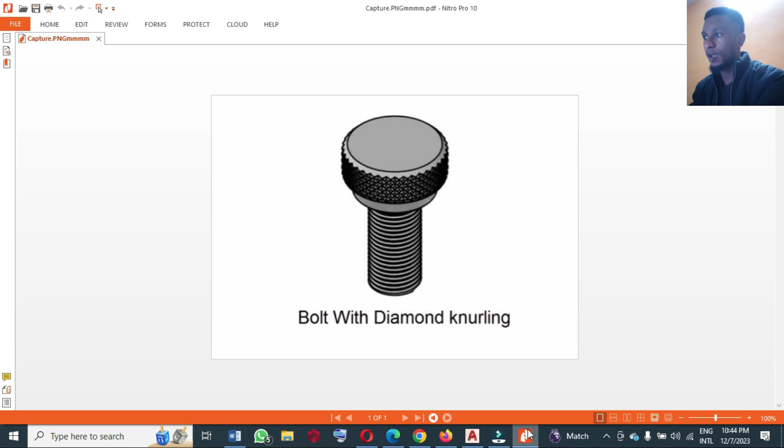This is going to be the second advanced practice drawing we are going to make. Today, we are making bolts with diamond knurling. It's going to be a little challenging, but with the previous knowledge we have got, we'll be able to make this happen. So, without wasting time, let's go to the AutoCAD environment.

So before I start, I'm going to turn off my grid to make this environment neat. I will start with the circle tool, and make a circle of radius 5 units.

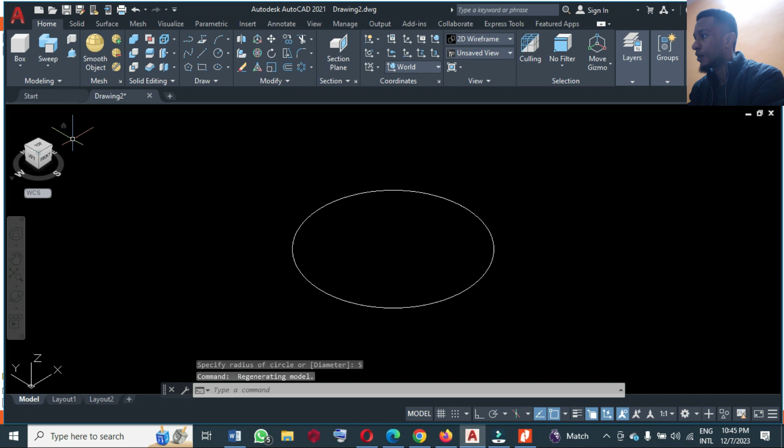And I will convert this circle to 3D. For me to do that, I would click on this home icon, then click on Press Pull. I will click on the circle and make it a unit of 20, then I will have this.

Okay, so I'm going to change the view to shaded so that I will see what I'm doing. Alright, I can now delete the 2D circle object that is here because it's not required again. I've deleted that circle now.

Next thing I'm going to do is make a helix. Let's see, so I'm going to pick this helix. I'm going to locate the center here at the bottom and make a radius of 5, just type 5 at the bottom.

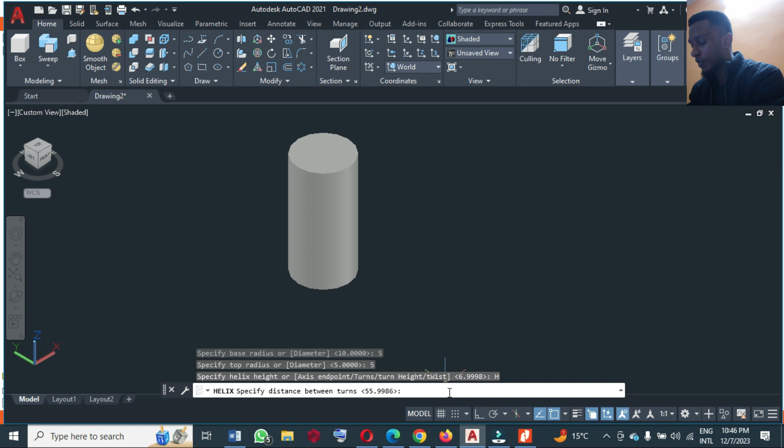That is the base radius 5, and the top radius also 5. At this point, I'm going to select heights here and then type a height of say 1 unit, I'll have this. So I'm going to locate the top center of this drawing and click, then I have this.

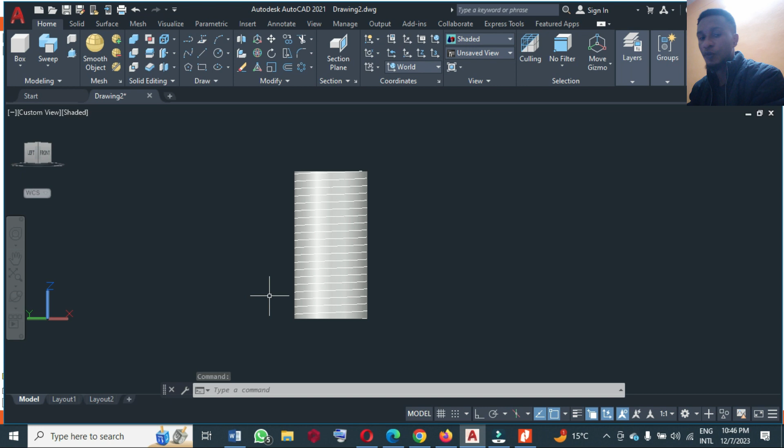So at this point, I'm going to make another drawing. But before that, let me rotate this a bit. And let me hide the 3D drawing - I will just right click and then isolate and hide objects.

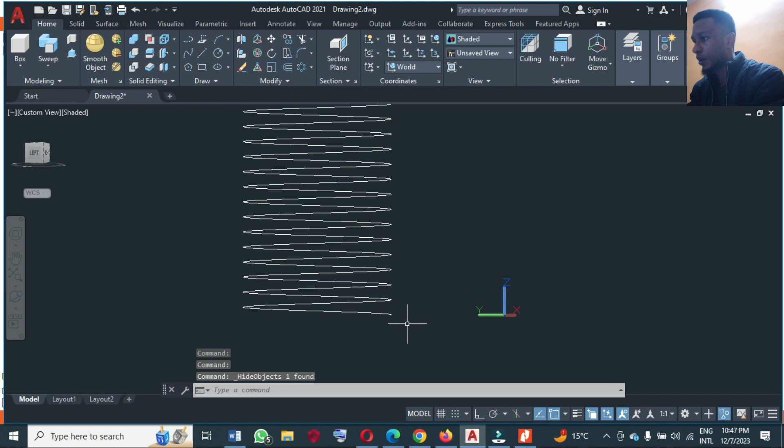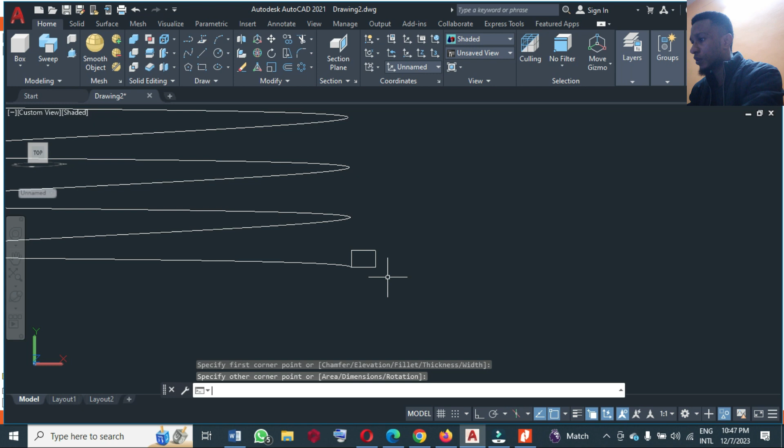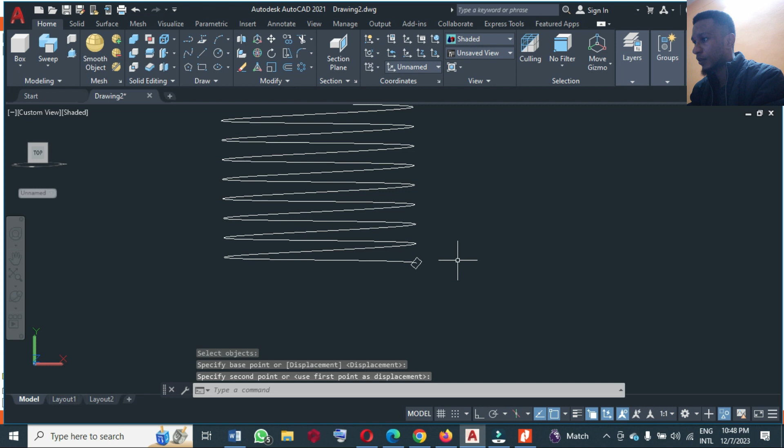Okay, this is where I want to draw the rectangle. Let me rotate it a little bit. So at this point I will select this face and make a small rectangle here, and then let me rotate the rectangle by typing RO, select the center, and rotate it around say 45 degrees. Then I'm going to move it at the center to this helix. I'll have that - so let me rotate that and see what I have there.

Okay, so at this point I'm going to sweep, let's see how that goes. So I will click on the sweep tool here and select the rectangle, enter, and select the helix. Let's see how it goes.

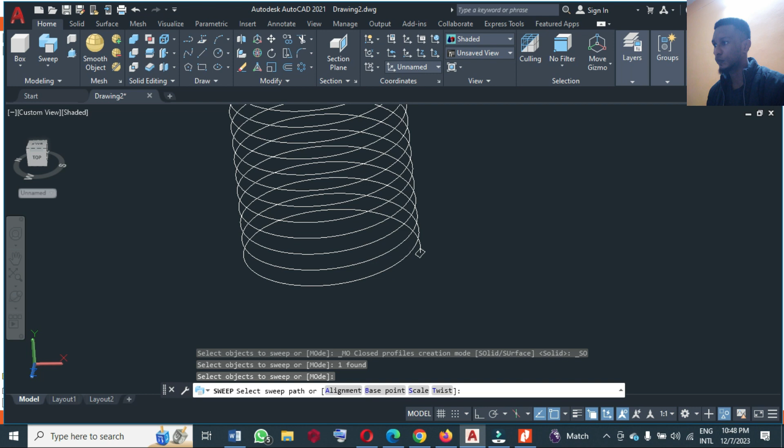And I have this. Okay, at this point I'm going to bring back the hidden drawing. So we just come here and end object isolation, then I will have this. Okay, at this point I'm going to subtract.

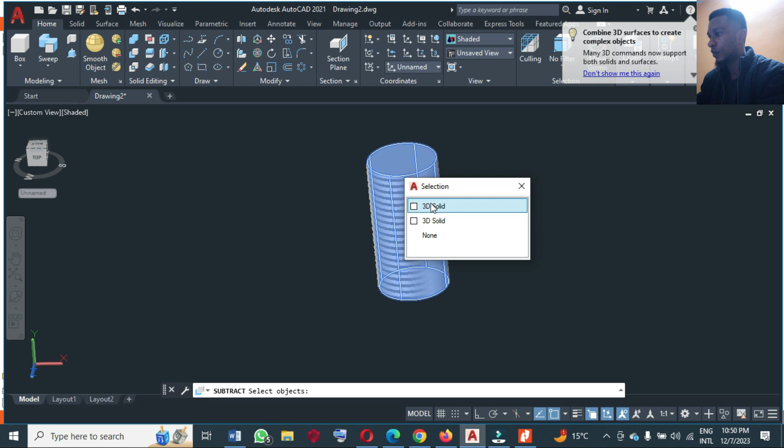So you click on this solid subtract, you select the 3D solid, enter, and you select the helix, enter, and we have subtracted that. So you can see it is now like one object.

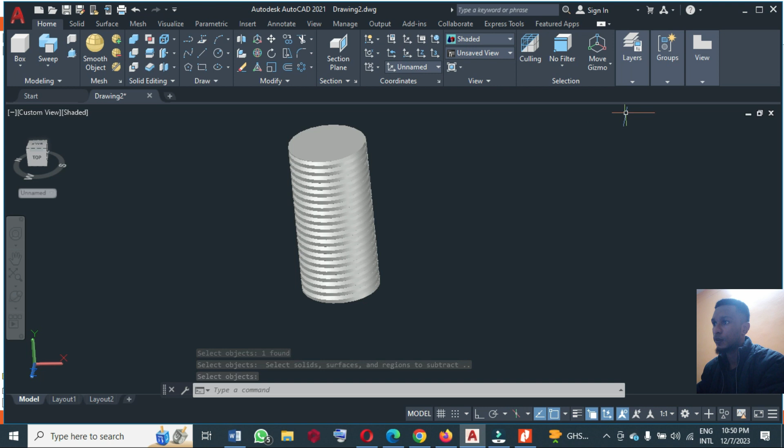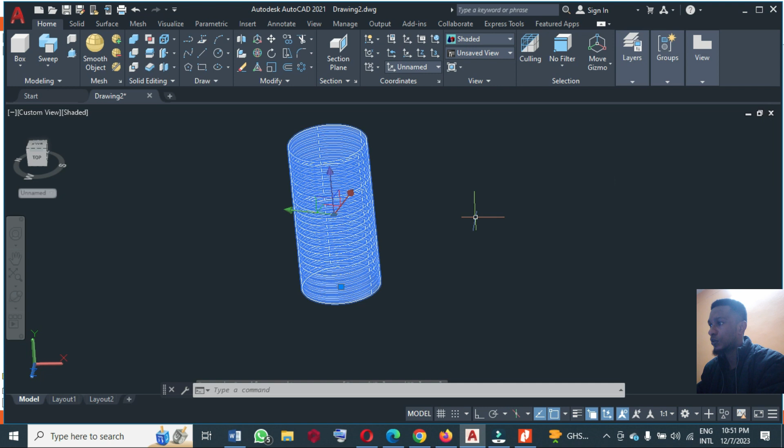Okay, so at this moment I'm going to create a layer for this. So you go to layer, click on layer properties, and click on new layer, and you have layer 1 here. So I'm going to close this, select this, and place it on layer 1. So this drawing is now in layer 1.

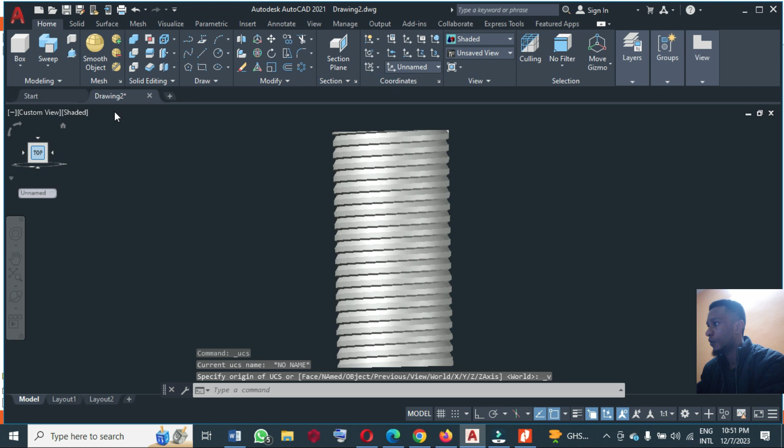Okay, so I will click on this top now to have this view. At this point I'm going to make another drawing. So I'm going to select the view and take a polyline, make a drawing to the right 10 units, go down.

Okay, I'm going to select ortho mode to have a straight line 10 units, go down by 7 units, to the left by 2 units, and then down by 4 units. At this point I can match it at this point, click here and then join it here, right?

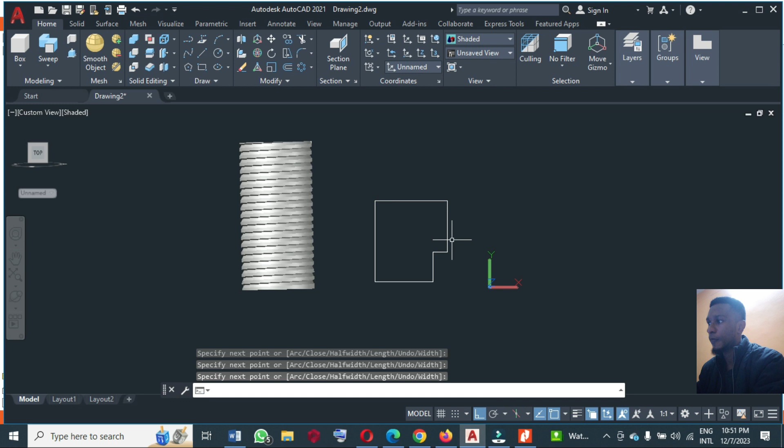So at this point I'm going to chamfer. So you come here, take the chamfer tool, select distance, put 1 unit, enter, and enter again. You click here, chamfer. You can enter to continue the command, click here, and enter.

We have this. So next thing I'm going to choose fillet and radius. You can put 1 unit, enter, and click here and here. We have this, right? So the next thing I'm going to do is to revolve.

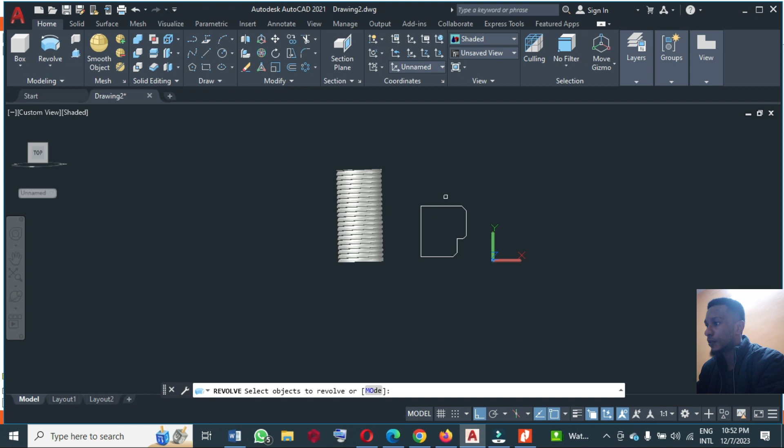So I'll come here, choose revolve, select the whole geometry, enter. You pick a point here and a point here and enter. You have this. Let me move it a little bit from the other drawing.

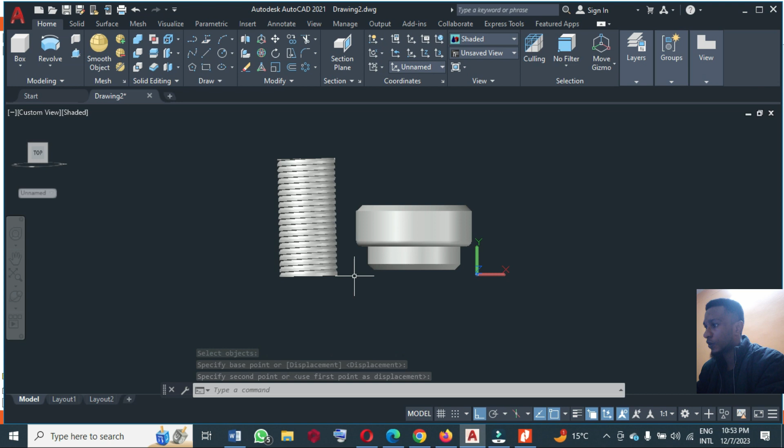Okay, so at this point, for me to continue, I will have to hide this drawing. But how am I going to hide this? Let me freeze instead, because I created a layer for it. So I'm going to freeze that layer, and it's gone. So I'm going to work only on this particular drawing.

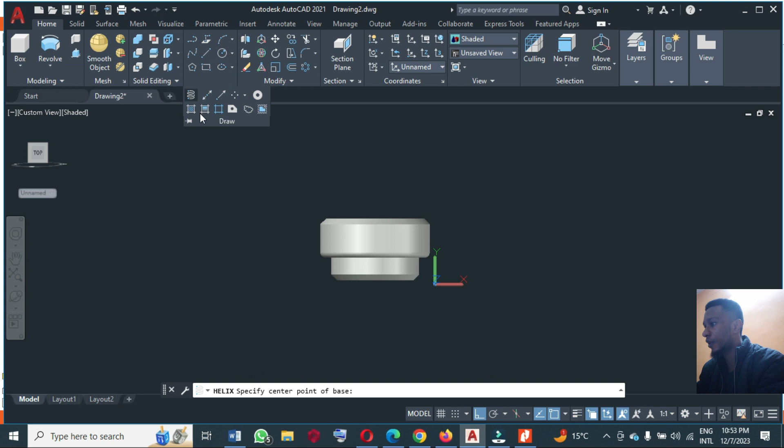So to do that, let's select this top view. Okay, let's make another rectangle. Okay, helix - so let's choose the helix tool from here, and let's rotate this a little bit.

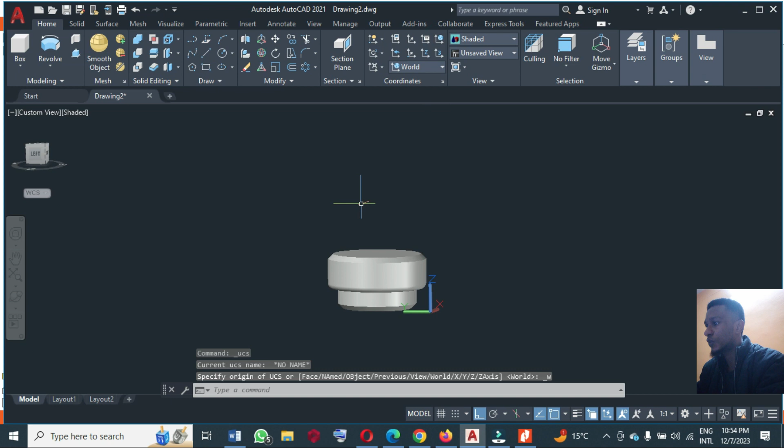Okay, we want to draw the helix, so let's select center. Let me see if this particular center is good. Okay, I chose the wrong direction, so click on this World UCS, okay, so we are on the left side. Click the left here.

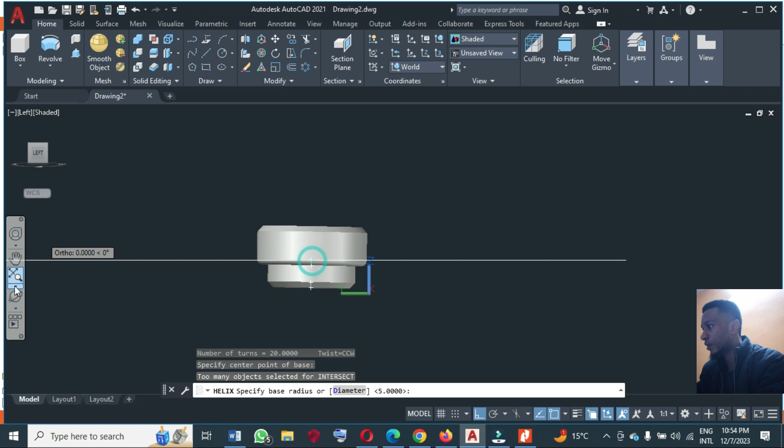You click on helix from the draw tool, and let's select center here. Let's rotate a bit so we can see what's going on. Okay, we selected that center. I think that's fair enough, because there are so many centers up there. The one at the base, not toward the bottom, but the second level, at the base of the second level, is what center I'm selecting.

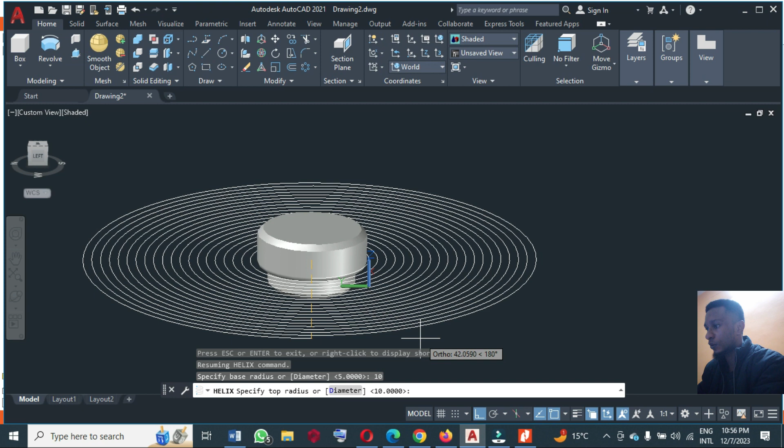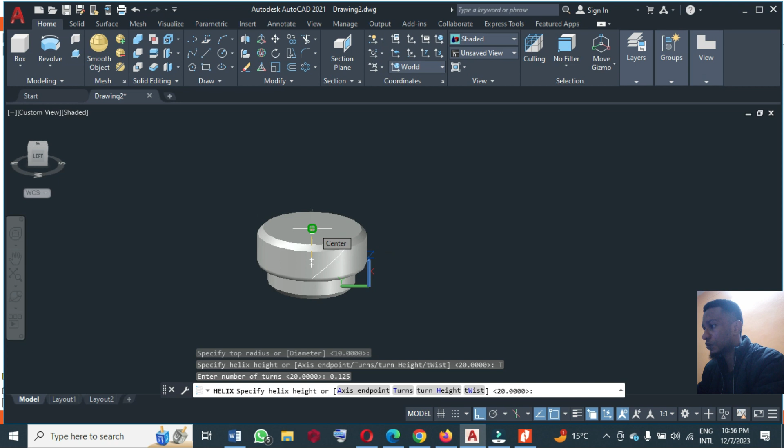So when you select that, you enter a radius of 10. You have this, and then that is the bottom, the top radius the same, 10. At this point we are going to select turns, not turn heights. So you select turn and enter 0.125, enter. At that point I'm going to select the topmost center here and click, and I have this. Yes, this is what I needed.

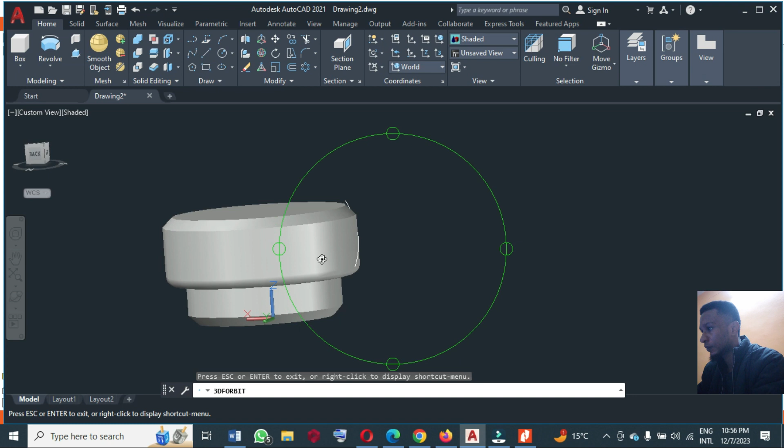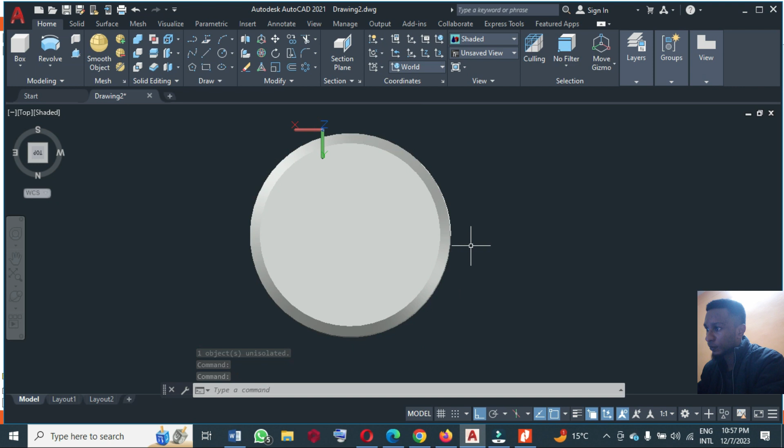Okay, so at this point I'm going to make another rectangle. Let me keep it at this point. Let me zoom in so you can see. Okay, then turn this thing to top. Okay, here we have it. All right, so we can now rotate this a bit and have something like this.

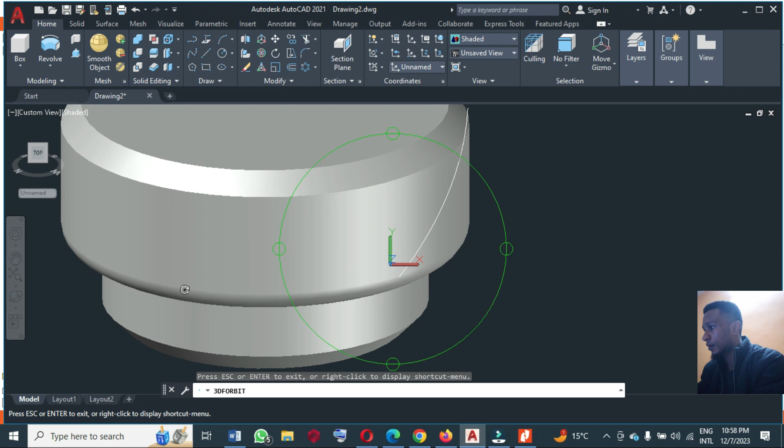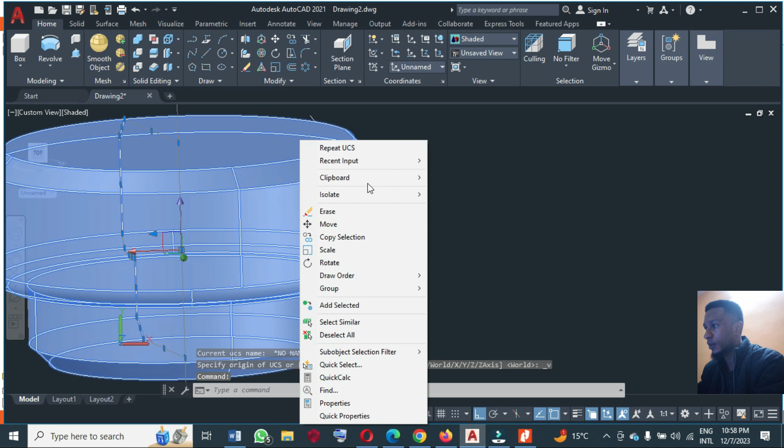Okay, so let me change the view. Okay, let's hide this a bit. All right, let's see how we can draw this rectangle somewhere here.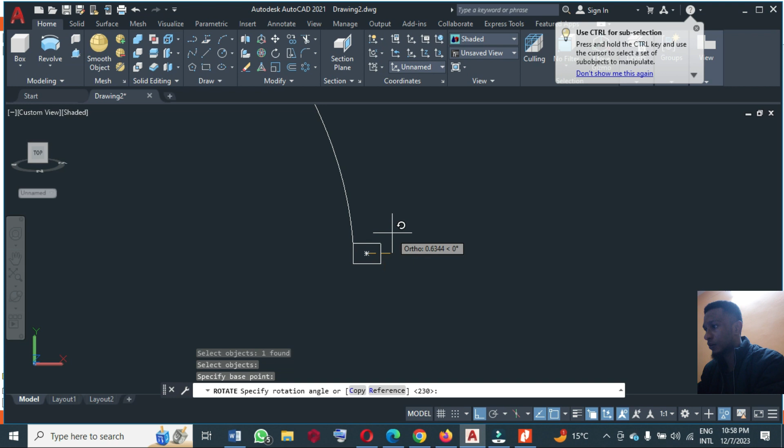Okay, so if I make this rectangle, I can rotate it. Let's rotate it again, just like we did the other one. Angle, say 45. I'm going to turn off ortho mode so I'll be able to rotate it the way I want. Okay, then I will move this

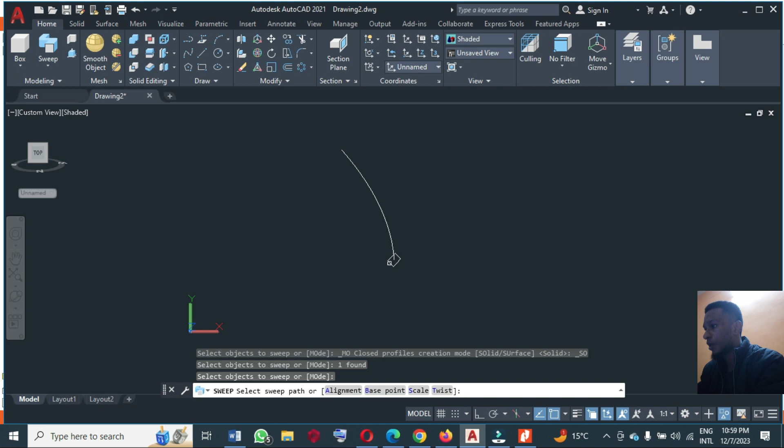to this point, and then I'm going to sweep again. So you come here, select sweep, select on rectangle, enter, and select on this helix, and we have this, this is what I needed. So I'm going to bring back our object by ending object isolation, and let's rotate this and see how it looks.

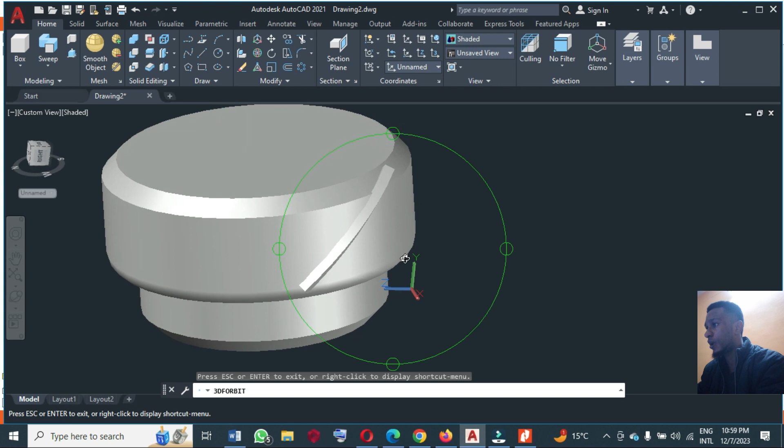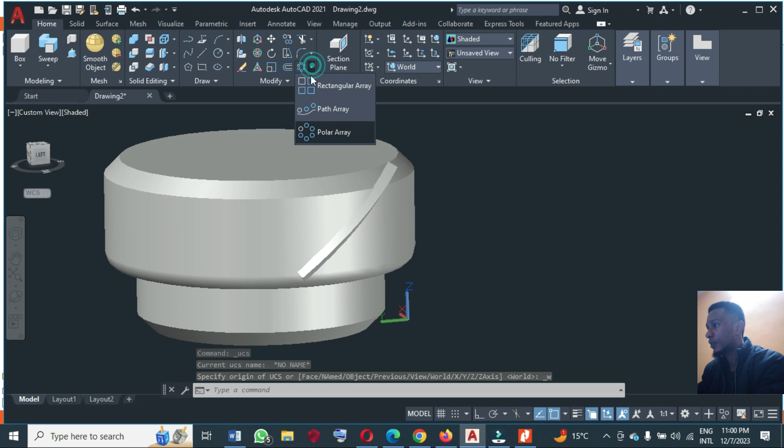All right, at this point we are going to make a mirror. We are going to do a polar array. So you click on this polar array, you select this object, yes, then enter. You select the center of this, that is wrong. So let's press Ctrl Z, select this world UCS, okay, and select polar array, select the object, this helix, enter, then select, look for the center here, and we have this.

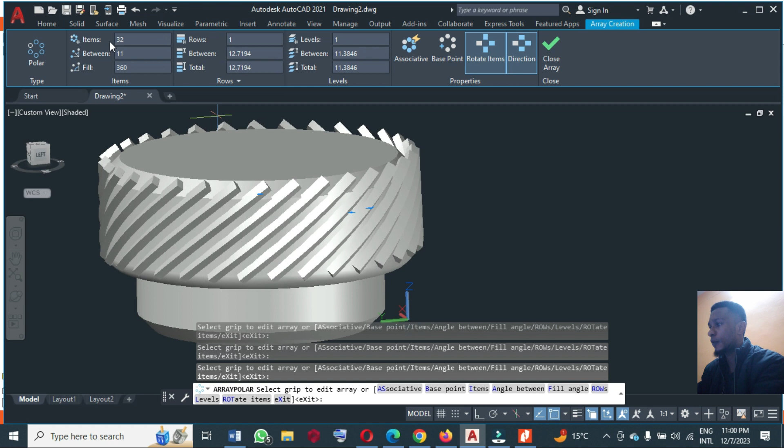So you can enter a number of items to be 20. See how it goes, 20 is too small. Let's enter up to 30. We have this, I think 30 is a bit better. The reason I'm saying so is I just want the spacing to be almost the same as the thickness of this helix. So let's take 32 instead. This is much better. I think this looks better.

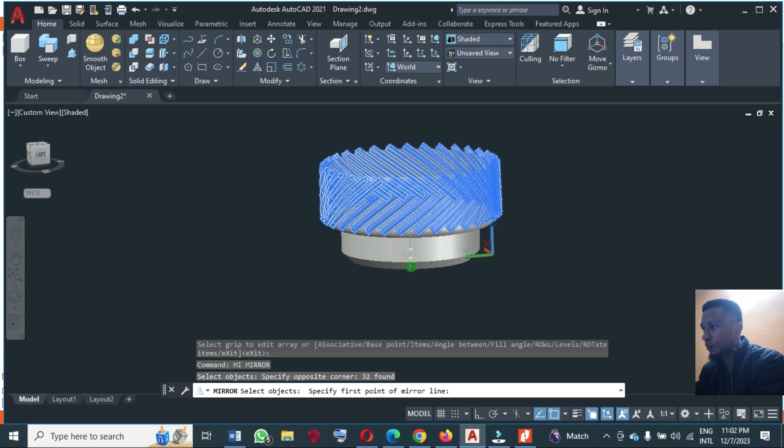I'm going to mirror this. So for me to mirror, first close the array. For me to mirror this, I will type MI, select the whole helix, enter, and I will pick any point at this point, downward or upward. Make sure it's straight, let me select my ortho mode to have a straight line.

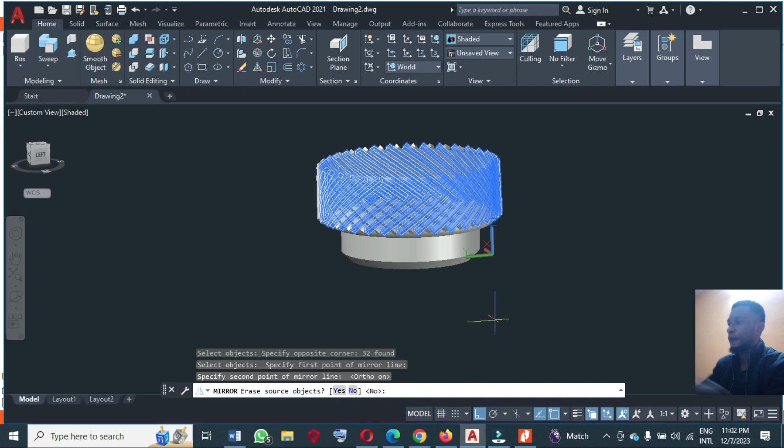Okay, let's wait and see what comes out of this. So it asks, erase source objects? I will say no, I don't want to erase, and I will have this. Is this what we needed?

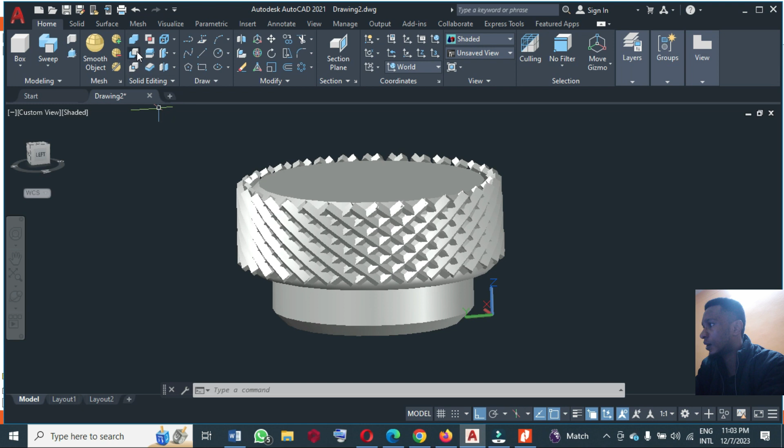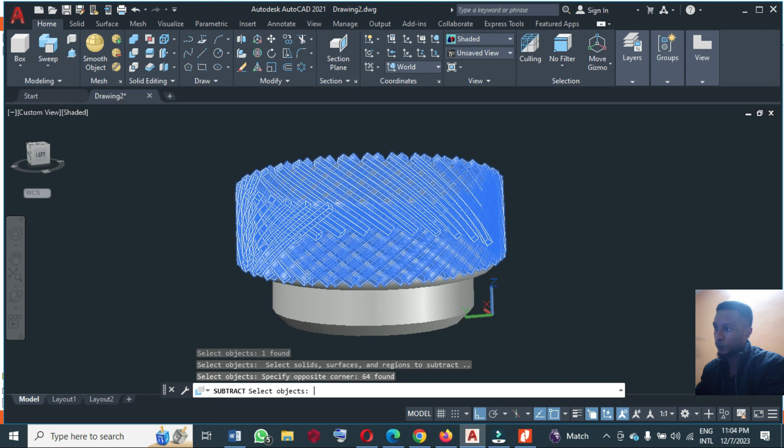Okay, so I'm going to subtract this. For me to subtract, I will click on solid subtract, select the solid 3D solid, enter, and then I will select the whole of this helix, enter. Let's see what we have. Okay, so this is the final result. Let's see how this looks. Is it fine?

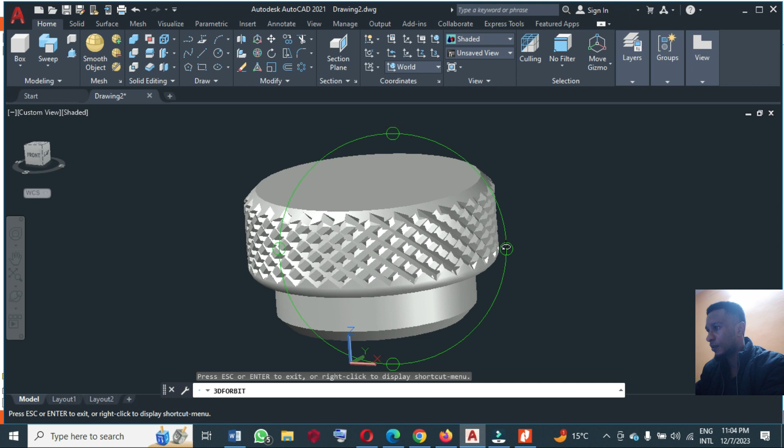Okay, I think it looks good to me. Okay, at this point we are going to unfreeze our layer to bring back the other parts, and let's see where it is.

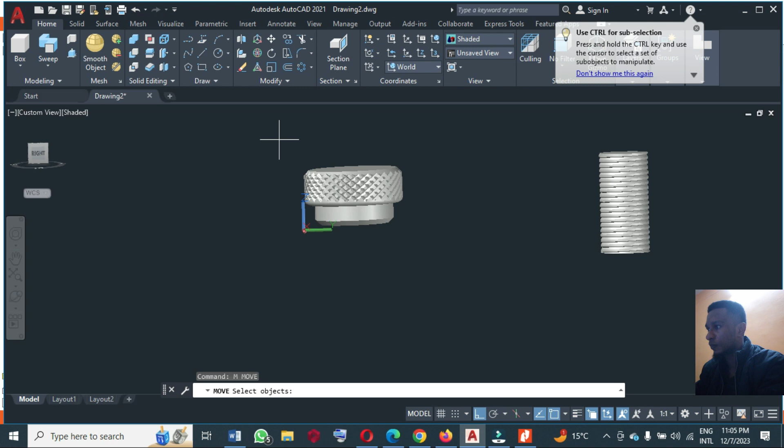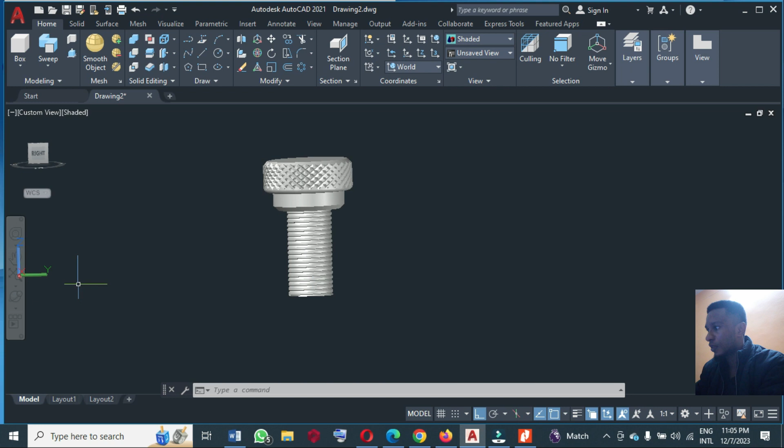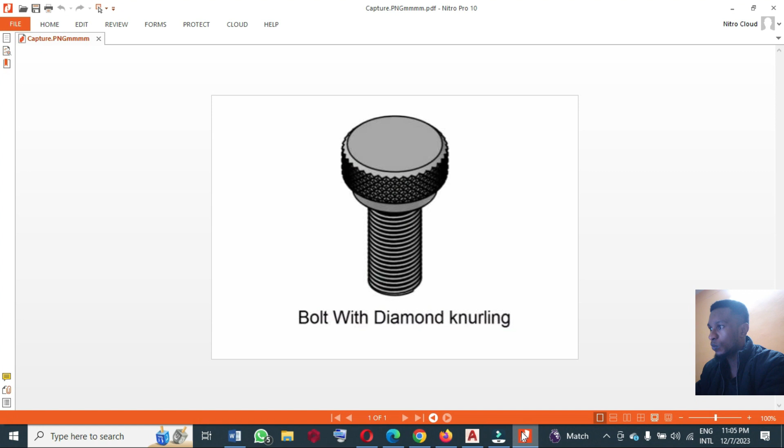Okay, so I'm going to move this. You select one of these centers, come here and select the center of this one and drop it there, and we have this. Let's check this. It's not too different from what we had here. So we have accomplished this.

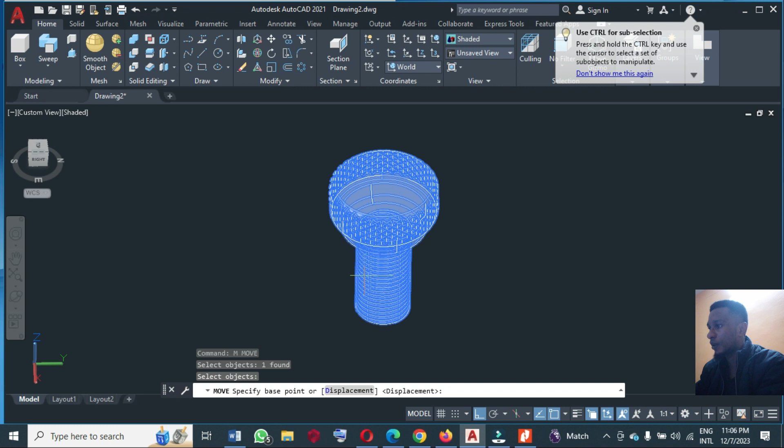Okay, all right, so the final thing we have to do is make it one object. So you just select solid union, select the whole thing and enter. So we now have this as one object. You can move it anywhere as one object if you like, and here it is. You can change views to anything you want, change it to realistic, any view, and that is it.